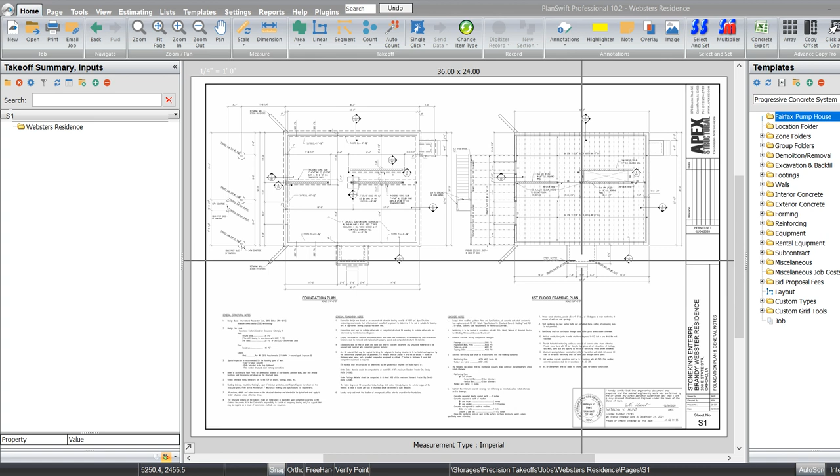So yes, with the stock plugin that you see here, these are all the stock items that come with it. With that, we can certainly do a residential takeoff here. We have just a simple house, pretty small one actually, doesn't even have an attached garage. Looks like it's 36 by 30, so we're going to be roughly in the 1,000 square foot range, somewhere right there.

So we're going to jump in, we're going to do this real quick. Not going to take very long, but we'll just show you that the parts here within the parts and assemblies in the plugin can certainly be used to do that.

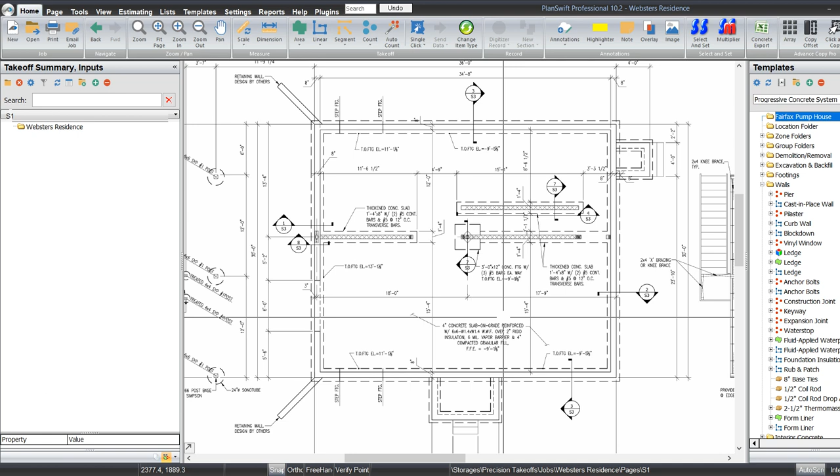Generally you see me do the work in the order that it would be done if I was on the job site. When it comes to walls and footings, I generally do not do that order — I do the walls first, and I've shown this in previous videos, and I'll show you again why here in just a second. Looks like here we got the footings jumping down to a walkout here.

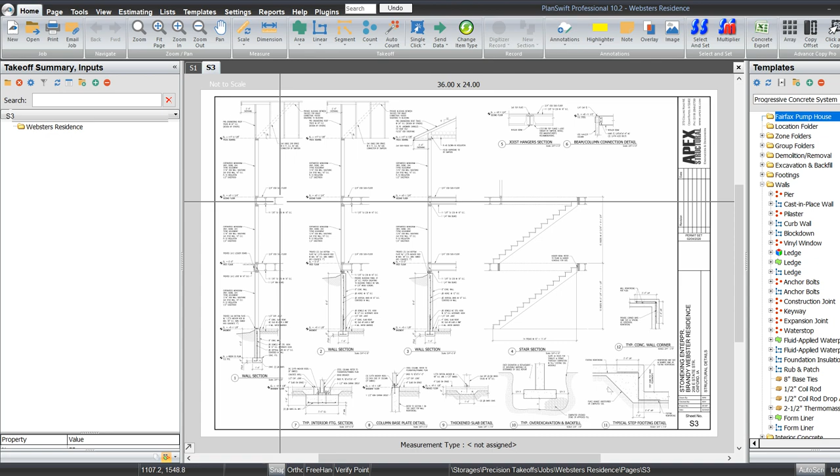So let's check out that 2 and 3, S3 detail here. So yeah, it looks like we're just going to have 8-foot walls, 8 foot by 8 inch on both of them, a 16 by 8 footing. Pretty standard stuff for a residential foundation here in our area.

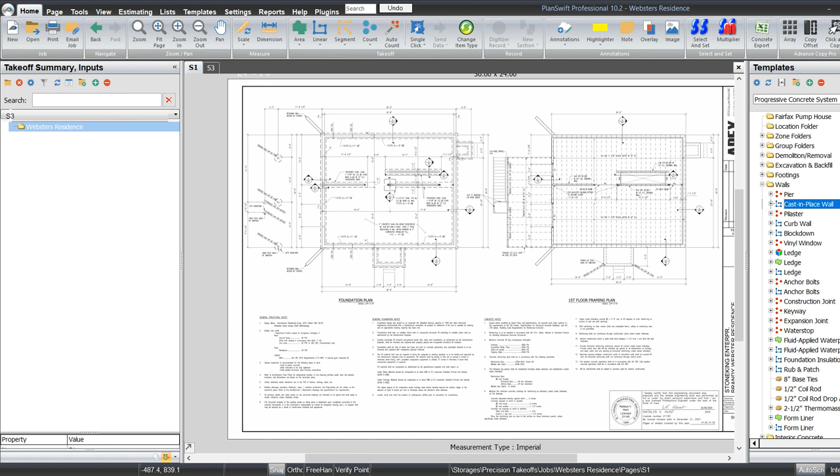So we'll just start dropping some parts in here real quick and get going. So again, all the assemblies are drag and drop. The standard PlanSwift digitizer assemblies are not, but all the ones in our plugin here are.

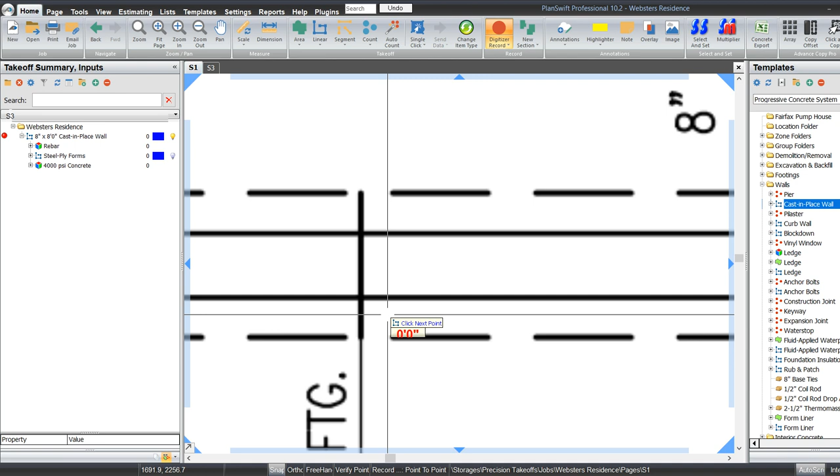So it looks to me like we're that 8 foot tall here, and looks like it goes around to pretty much the same area on the other side. Looks like it jumps down about the same spot there. So we'll just start here.

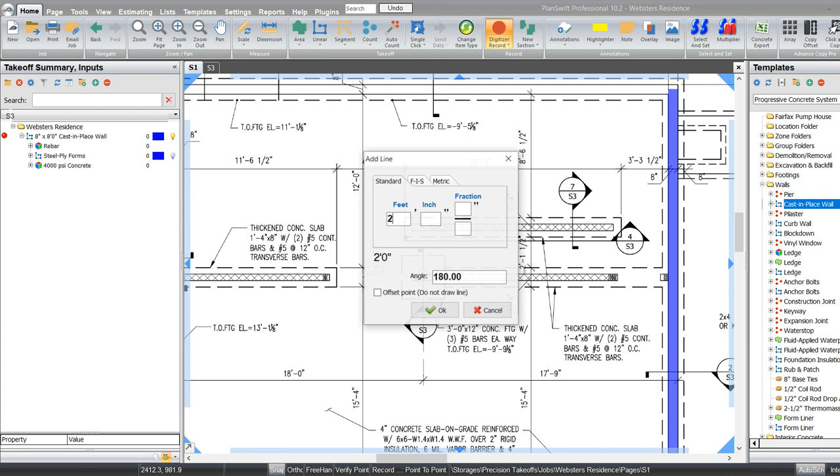And when I scaled the page, it was pretty darn close to being right on the money, so I'm just going to go with the measurements here instead of looking at the actual dimensions, and I bet we're going to be alright. We'll check one here, and let's see if that gets us right there. So yeah, looks like those are correct, and we should be 30 foot out there, and we are, so that's good.

Alright, it does give us some footing elevations, so we do know where we're at, and it's not even a 2 foot jump. Looks like it's 1 foot 8.

So what I'm going to do before I do any more, I'm going to get the rebar and the items set on this wall here.

Looks like we're going to have number 5 uprights at 12, and number 5 horizontals at 12. So let's just drop those in. That way when we duplicate this wall to change the height, everything will change with it, and we don't have to do it again here.

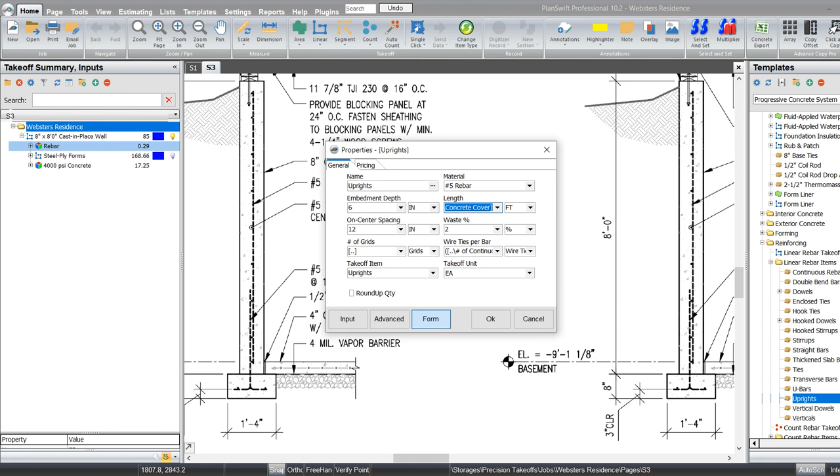So we'll drop those in, we'll change it to number 5 here. We're going to be 12 on center, going to be 1 grid of those. And we'll need to change this to use it for the wall and not the footing there. And yep, that'll do that.

And we got 1 grid of, I think these are going to be number 4s preset, but we need to change them to 5s. This customer here, the customer I'm doing this takeoff for, he wanted to bid the job the way it shows on the drawings. Really in our area it's all going to be number 4 bar, but he wanted to bid it the exact way it was shown on the drawings. So that's why we're using the number 5 bar. And looks like that's going to be it.

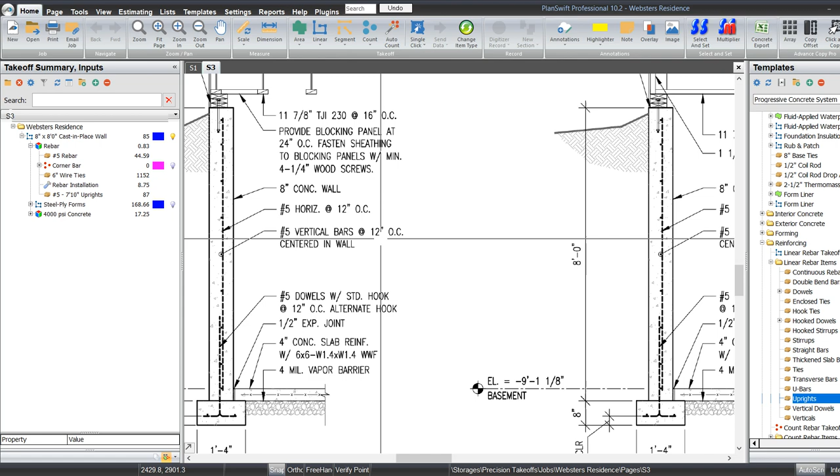Yeah, anchor bolts to be supplied by the builder. He will always exclude them.

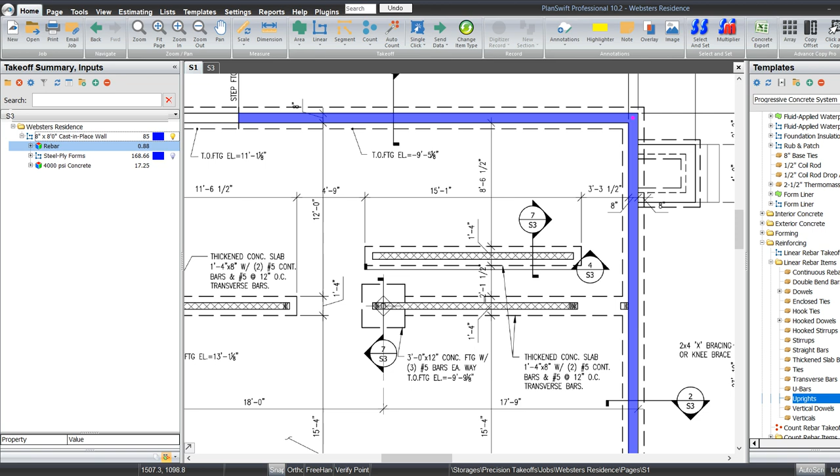So we got that set. I guess we could pick up our corner bar real quick if we want to do that. Most guys will just take their 20-foot sticks of bar and bend them around the corners. This particular customer doesn't—he will actually do it the way any engineer would show you. I've never seen an engineer take a 20-foot bar and bend it around a corner.

All right, so now let's just take that and duplicate it. We're going to go 1'8", so we're going to be at 9'8" because we had a 1'8" jump. Let's just change the color there. And the height of those bars and the horizontal bars would actually change with that.

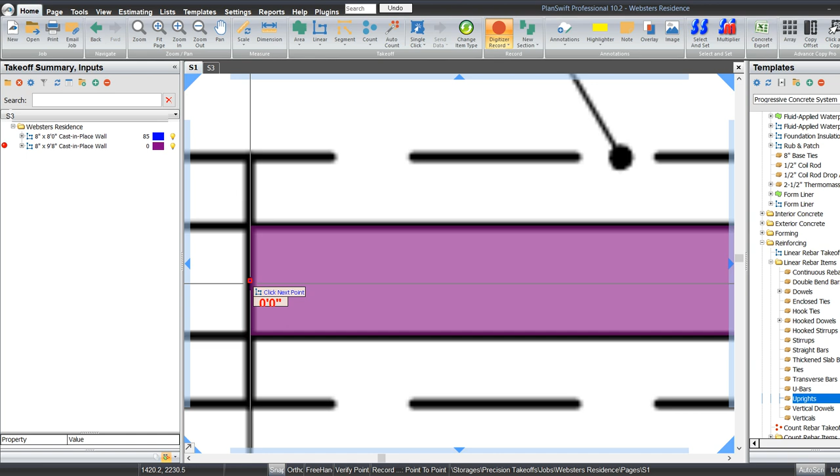And I'm just going to do it at 5'2". I imagine this is going to be a scenario where you're going to probably just do it 5 foot, because he's got 2-foot wide panels, so he'd probably do 2 panels and a 12-inch filler, or he might even extend it to 6 foot if he could. But I doubt he's actually going to do 5'2". Again, we're going to do it the way it shows on the drawing here.

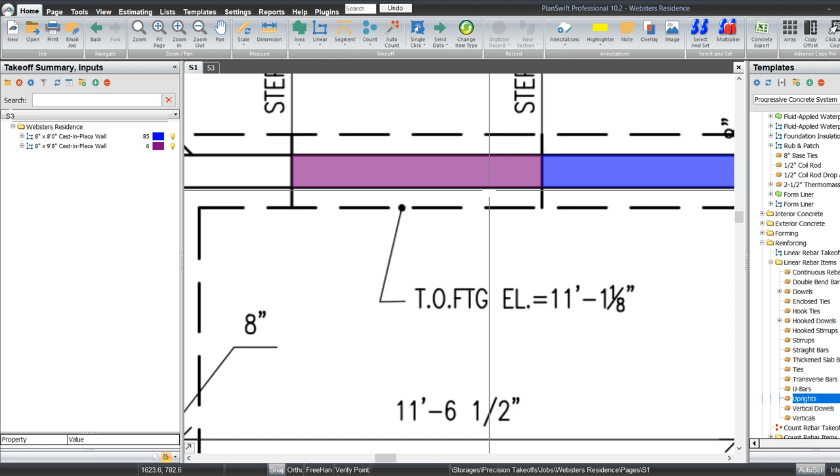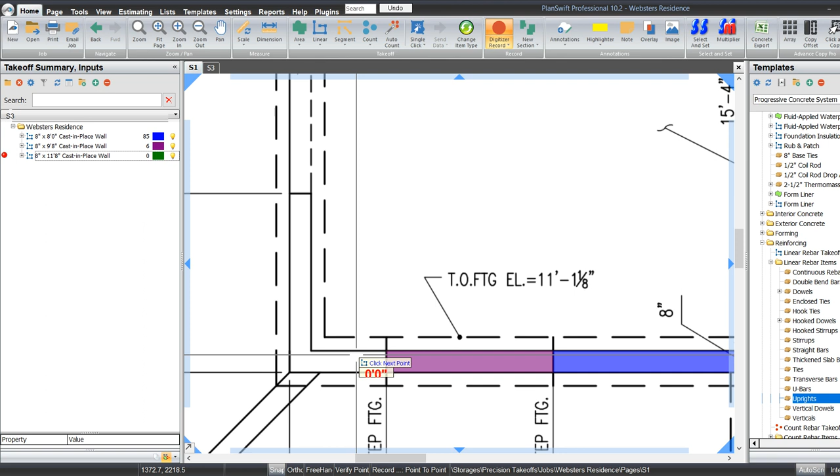And it looks like we're going to jump one more time, and this one is going to be a 2-foot jump, so that one's going to be taking us to 11'8". Again, let's just change the color so we can see it a little bit better. And what was that? 29.4, I believe.

All right, there's our— nope, sorry, that's wrong. We got a walkout there. I need to do that. Sorry guys, I got a little bit ahead of myself.

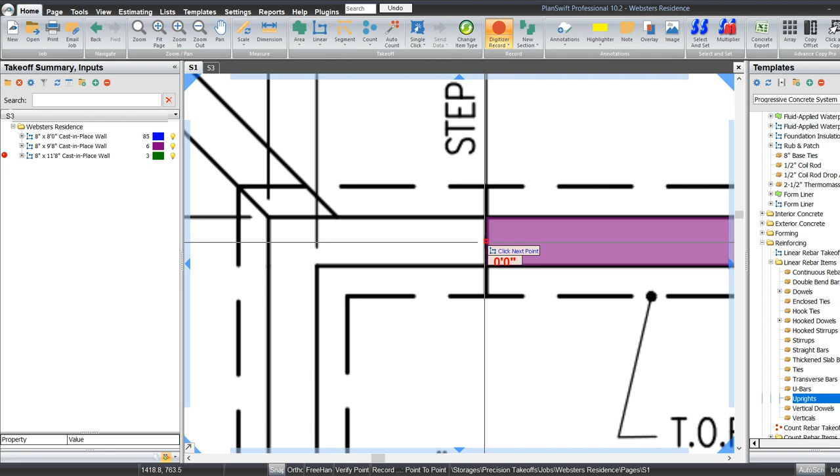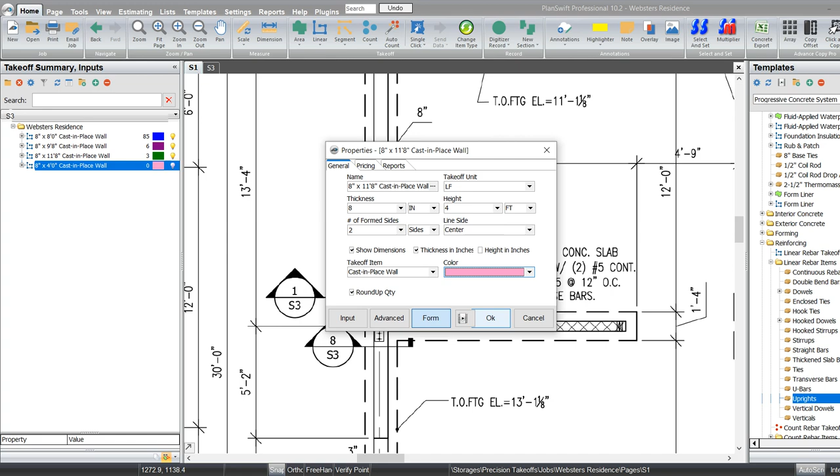All right, so there's the 2 side walls anyway. Now we need to do a wall there for the walkout, and that's going to be 1S3. And we're just going to be 4 foot by 8 inch, and looks like number 5's at 12 on center again. So we'll just take this and duplicate it and change the height again. So this will be our walkout there. There we go.

Okay, so there's our foundation walls done that quick. He wanted to exclude the retaining walls for now—it's going to be site dependent. The owner was talking about taking a large majority of the dirt off both sides of the house down, so those might not need to be. He wanted to do some block retaining walls, landscape walls, instead of doing poured concrete. So that'll be something extra to add on later, depending on the dig.

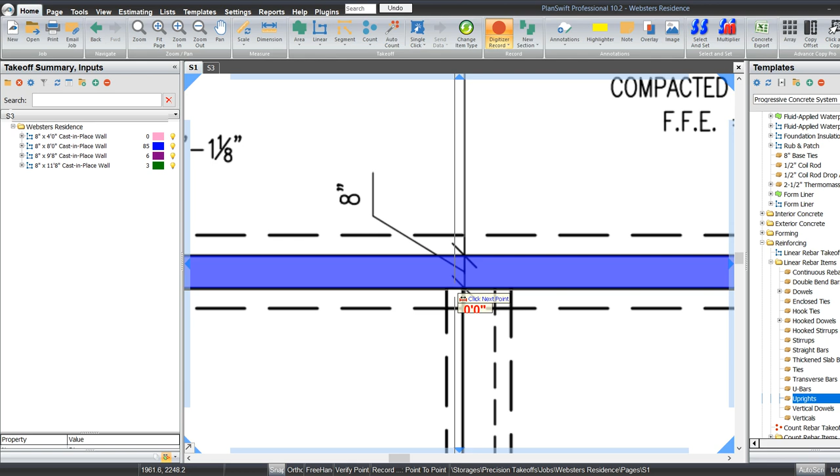And actually, we got these stoops here. We can get them real quick. Let's see how far out they are. Yeah, you're only 5 foot out. You're not even going to be far enough to say he goes a 3 foot dig there. Yeah, you're not going to have 2 foot to even put that footing on. You're only going to be a foot back. So we're just going to have to do these at 8 foot walls also.

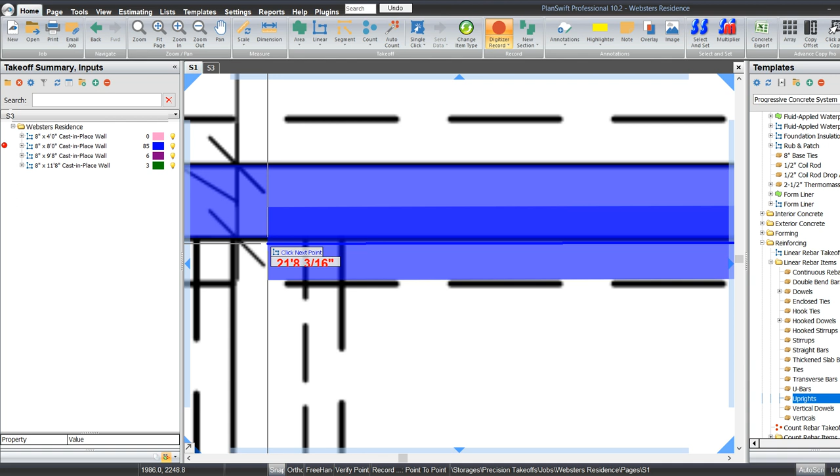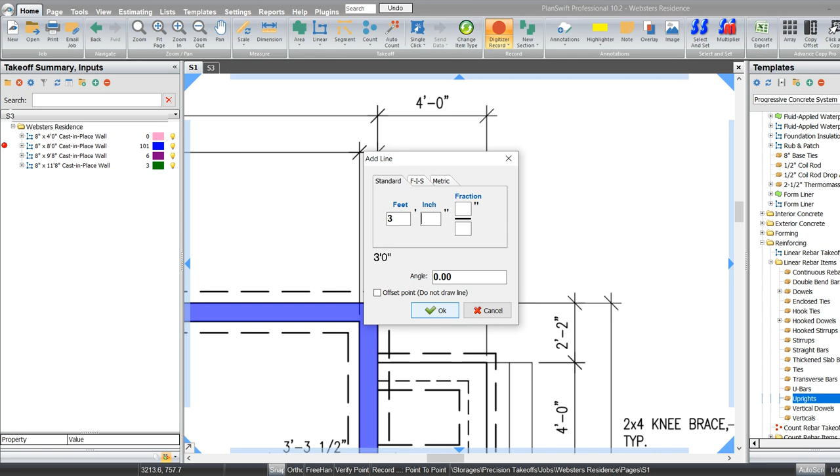So we'll just go ahead and drop these in. What was it, for 8? Okay, and we got another little one up here, even smaller. Give dimensions, sure it does. Alright, there we go. So those are both 8 foot walls, match those. I'll possibly drop down here for the stoop cap to sit on, maybe, I don't know. But that's just information we don't have, so we'll just assume they're 8 footers.

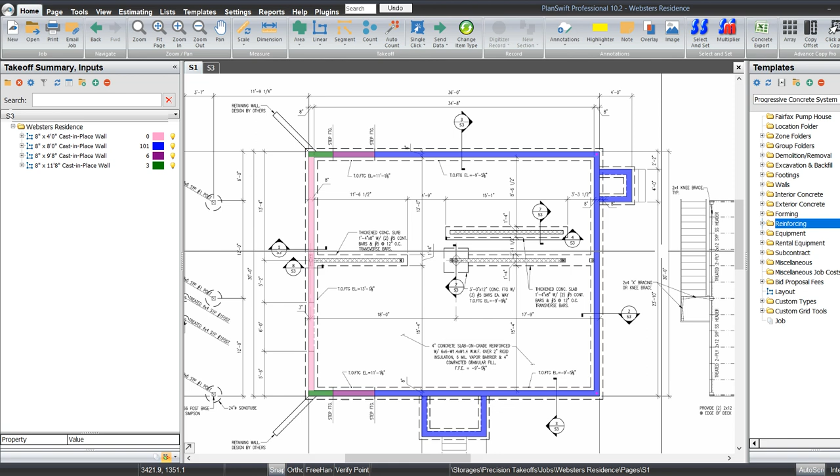Okay, now again, I told you a lot of times I do the foundations first before I do the footings, and here's why. I'm never going to have dimensions to the footing corners. I'm going to have dimensions to the walls though. So once I get the walls set, generally, and certainly with a residential house foundation, we're going to be centered on there.

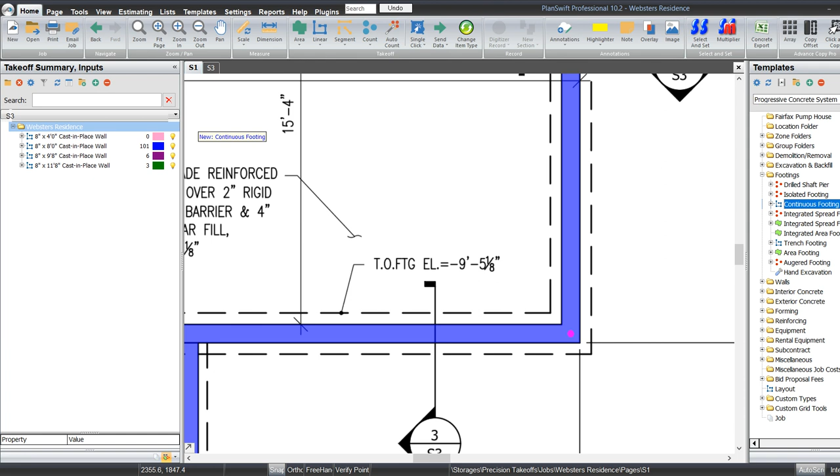So we'll just drop a footing in here, and all this footing window will pop up for us. There we go. So we're going to be 16 by 8. Elevation doesn't matter because we're not putting any excavation in here. Number of formed sides, I'm going to set this to 0. Actually, I'm going to set it to 1, and I'll show you why here in a minute.

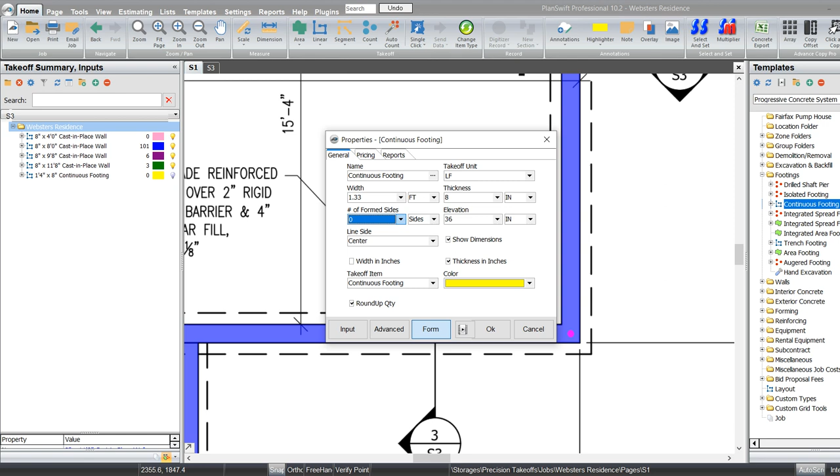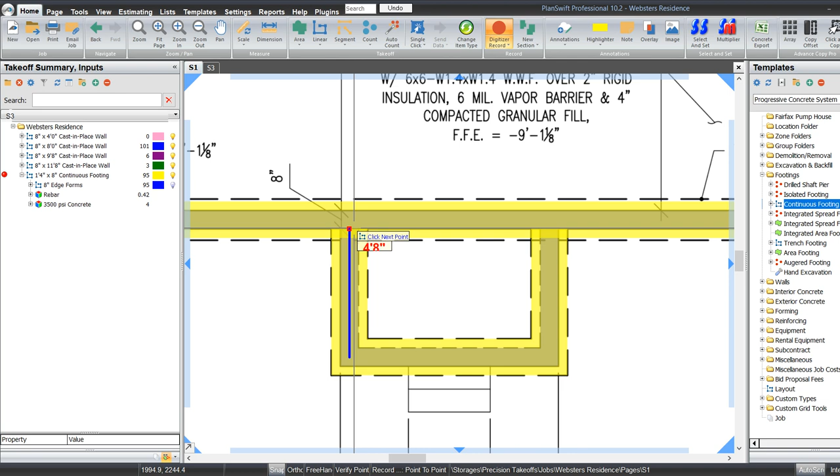So basically, we're going to have this footing here. This is all going to be the upper footing. And yeah, I realize that those footings are overlapping there—we'll fix that here in just a second, it only takes a couple seconds to fix that. And we're going to have that footing there. And this footing, even though the walls are different heights, the footings are all going to be the same.

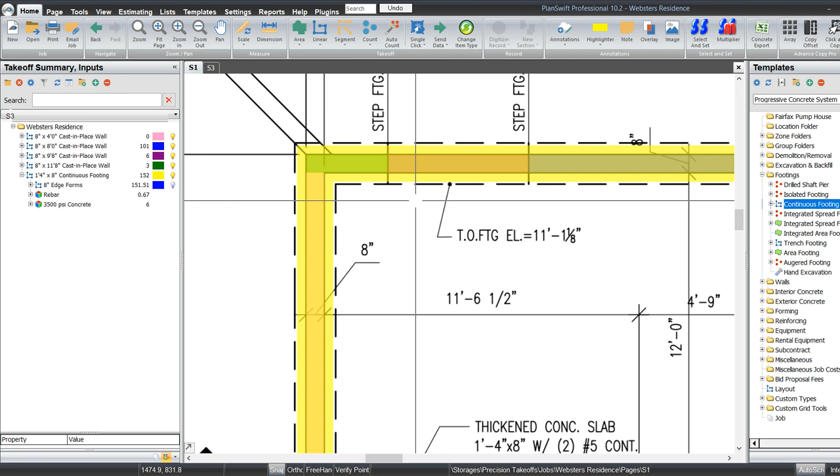Alright, so there's our footings. So now what I'm going to do is back them off so they line up there on the edges. Not a big deal, but it only takes a second to do it right.

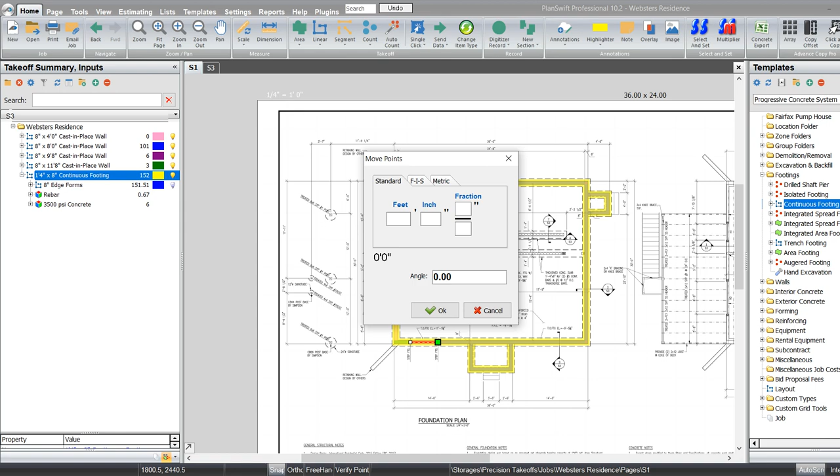And now I've also got these, since we got jumps here, I just go in an extra foot on those to pick up some extra concrete on them. Same thing here. And then we can just take that and put it back behind the walls.

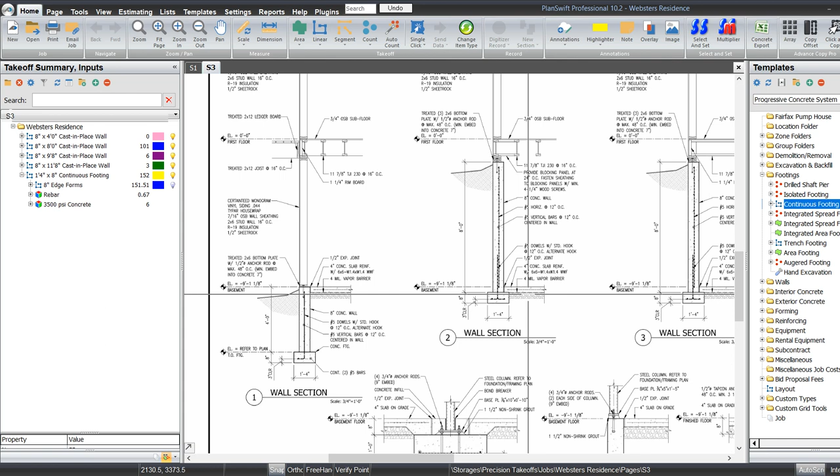Let's go back to our detail and see what we got, 2 number 5s. We're going to do number 5 dowels sticking out at 12 on center. So we'll go here, number continuous rebar, we'll just set that to 2. Number 5 is already set. Residential footing, we don't have any transverse bars.

This here, I'm going to go 3'4". Actually, I'm not even going to go to that. I need 4, 30, 34, 2'10". I need 3 foot to get me the proper lap splice on that. 30 inches sticking out of the footing. Need those at 12 on center. That's good.

And that should do our footing right there.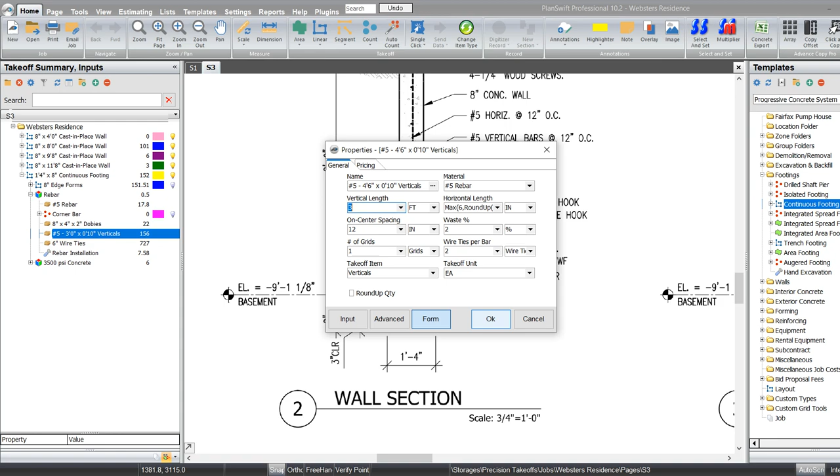So now we can just pick up some corner bars in that footing. Need to pick up a couple of corner bars in that pink wall right there too. So we'll just go ahead and pick these up real quick. Get all our footing ones done and come back and grab them wall ones that we missed.

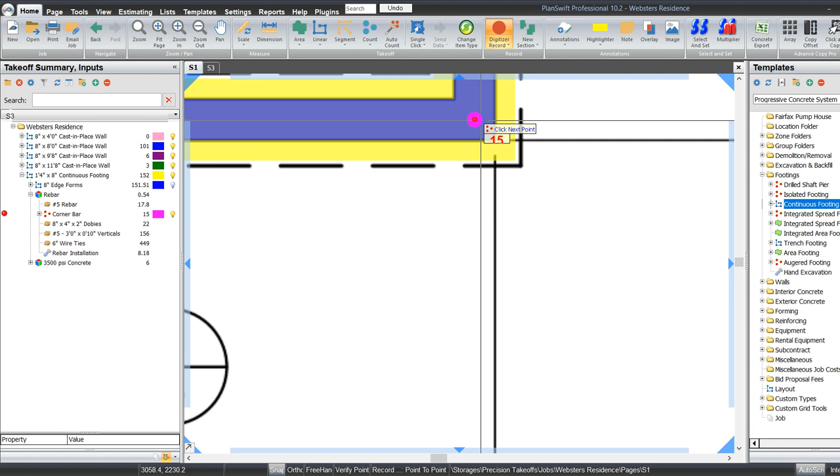Okay, that'll do the footing. And let's turn that off. Let's just get these wall ones right here. Since we've already started on them, let's just continue with that same count. Need a bunch of them up here.

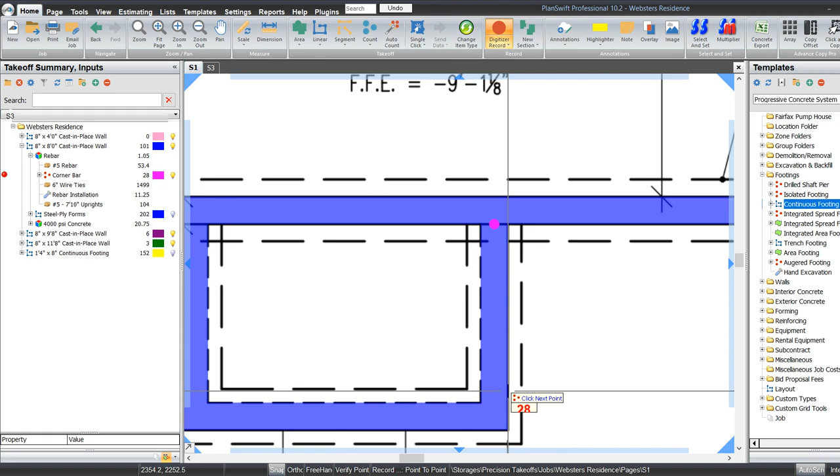Okay, got those, and that pink wall we need to tie in. And the reason I'm tying the pink wall into the green, not the green into the pink, is because the pink wall is shorter, has less bar. If I tied the green one into the pink wall, it would be sticking bars out of here that are above this wall that would do us no good.

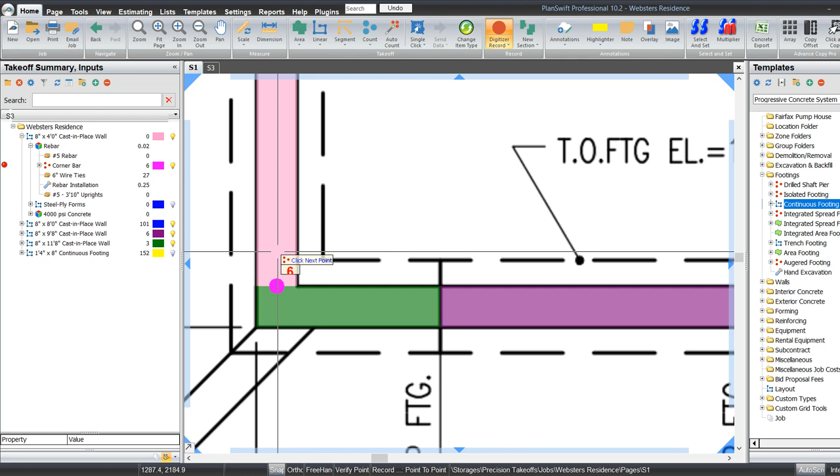So that's why I'm tying the shorter wall into the taller wall. That's why I'm digitizing the corner bar on that. The size of the bar is obviously going to be the same, it's just a matter of how many of them we need. Okay, and that should do that.

Now we just have a matter of some interior footings there to pick up. And those are on 7S3. Where's that at? Right there.

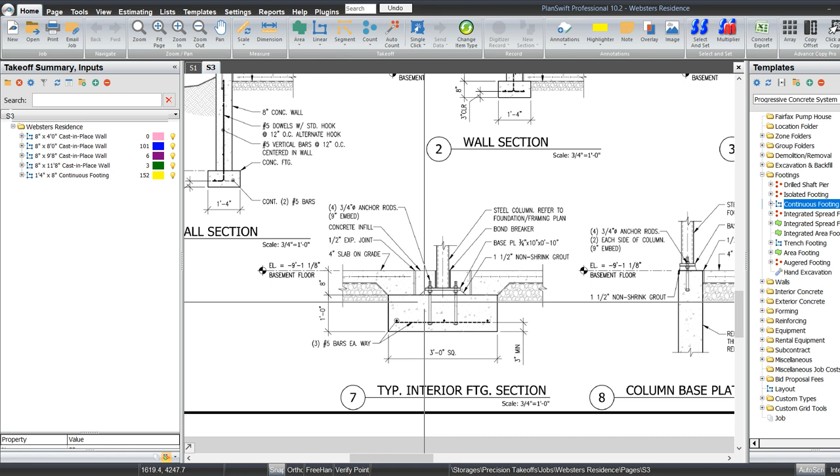Okay, looks like that was, says that was that one, but it also says that's the same one right there, and that ain't, oh, that isn't right. What's 4S3? Stair detail.

Thickened slab. Huh. So I guess that's just some thickened slab, and maybe

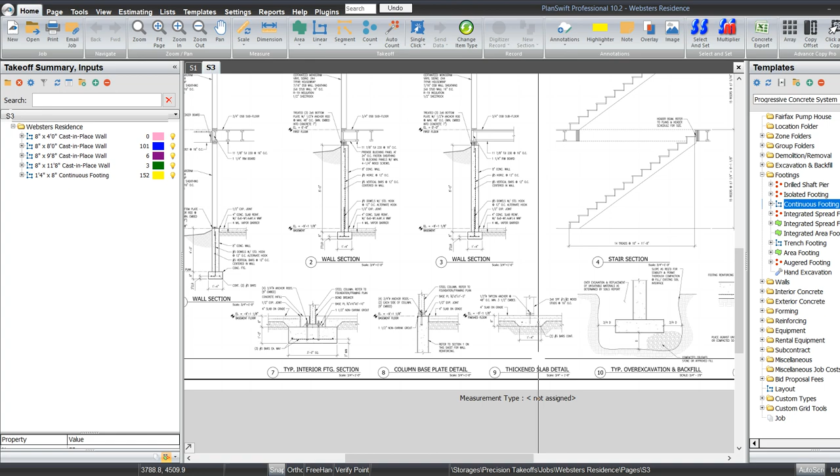looks like we're just doing that one footing right there. So 3x3, easy enough. 3 by 3 by 12, 3 number 5s each way. Looks like the rest of it's just thickened slab there. 3 by 3 by 12.

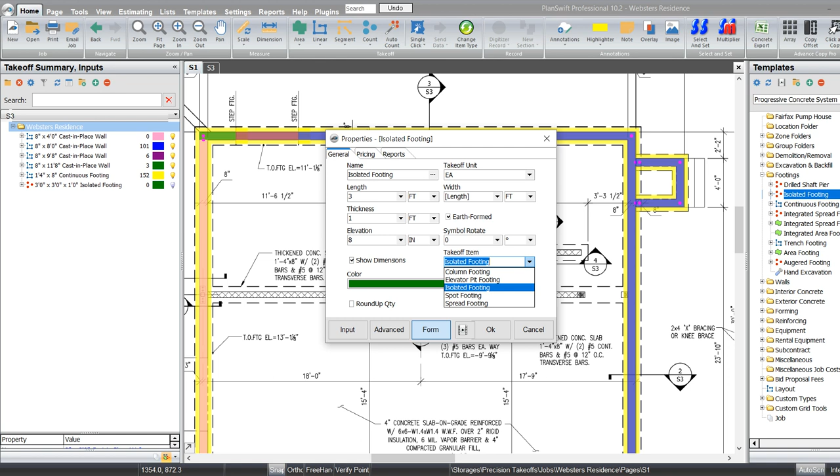Enough. Okay. Thickened concrete slab. Yeah, I'm not sure. Shows those tied into that footing, but it's really not. Doesn't show a detail for interior footings, just shows a thickened slab. So that's all right, we'll get it in there.

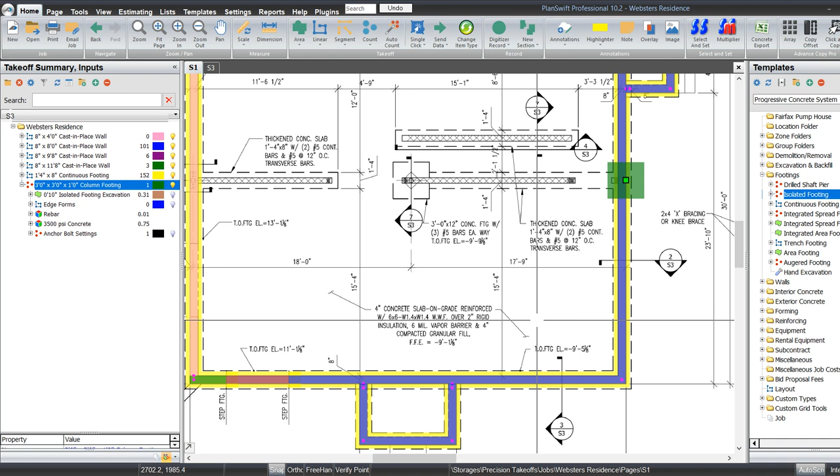Over 17.9. There we go. So there's the one footing that we actually have, and yeah, I mean they're going to be framing a wall right there anyway. They're never going to do a column block out on that, so I'm not going to put it in there. I know he wanted it bid the way the drawings show, but they're never going to do that.

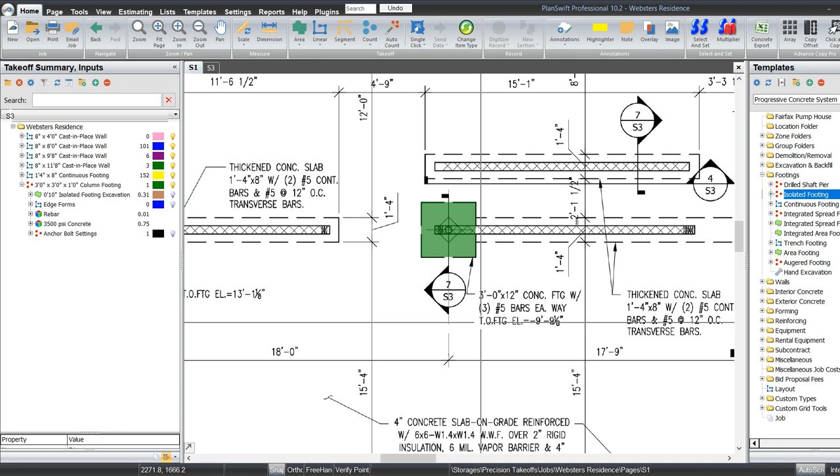So looks like that's it. Looks like we're done with the footings and walls. I guess one thing we can do is we can throw some jump bars in there. Let's do that real quick for where the footing jumps are there.

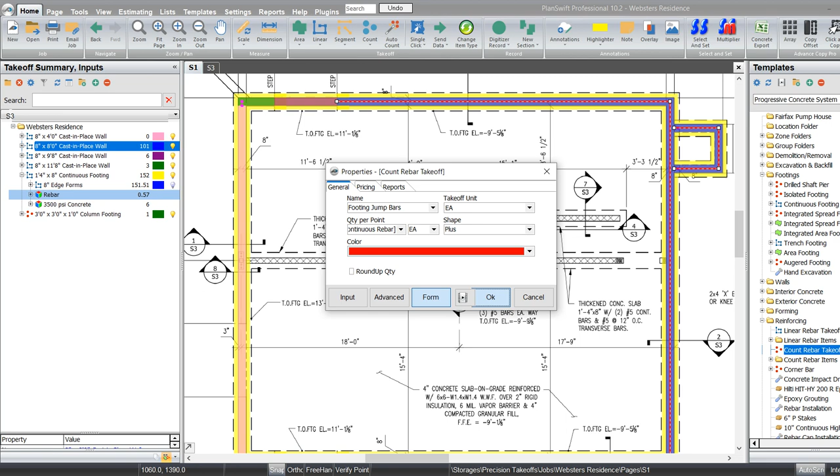Alright, so we got a footing jump there and there, and we got 2 more here. Okay, so we'll just go to our count rebar items.

Take our footing jump bar, drop it in. We're going to be number 5s, and we're going to have 2 bends. I always go 2 inches longer than the lap splice, which would be 2.6. Obviously on a number 5 bar, it'll be a standard lap splice.

Leg 2 is going to be 2 because we got a 2-foot jump on one and 1'8" on the other. I'm just going to leave them at 2 instead of doing them separate. And that'll get those for us.

And right there, I know you see 9 there, you see nothing there. It's just a refresh issue. If I do that, it's actually there.

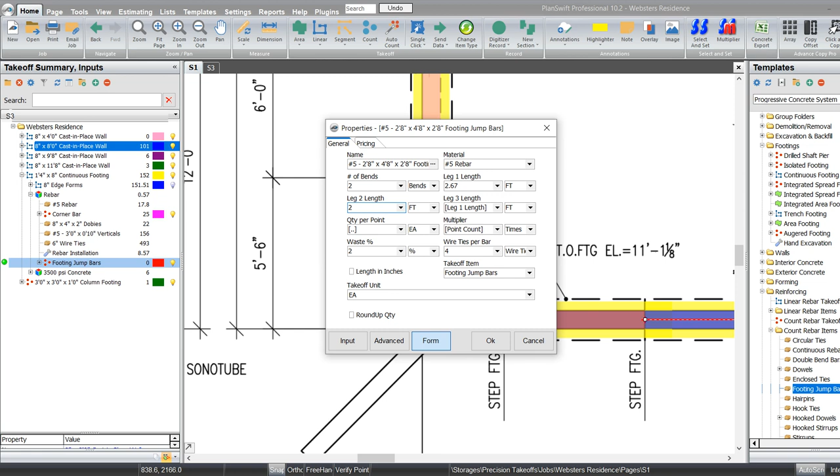Okay, so let's just get everything in order here so we can keep track of it. We got that, we got that. What else? That's gonna be it. It's ready to move on to the slab.

So let's go here, and what are we gonna have? 4-inch 6x6 wire mesh, 2-inch insulation underneath it, 6 mil vapor barrier, 4 inches of rock.

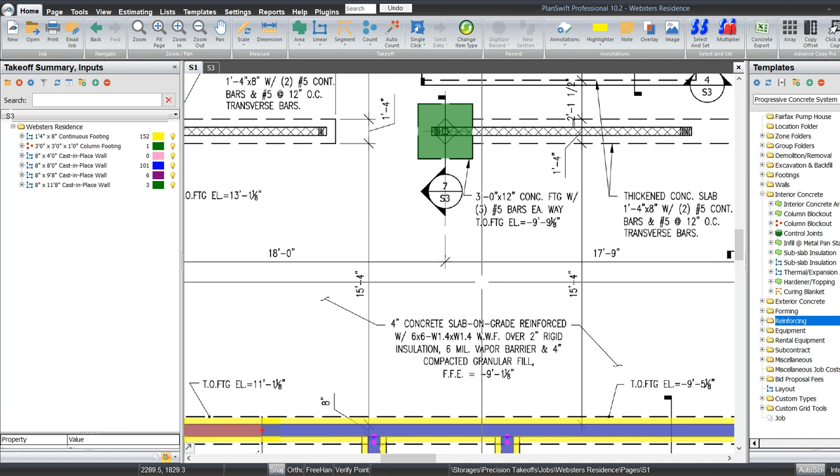I know they're going to do 6 inches of rock, but he wanted to leave the rock out and build that separate depending on the dig, because he's not digging the hole.

Let's just get our slab in here. So we'll go 4-inch, rename it for residential purposes here if we want to. And we'll be just inside the walls, obviously.

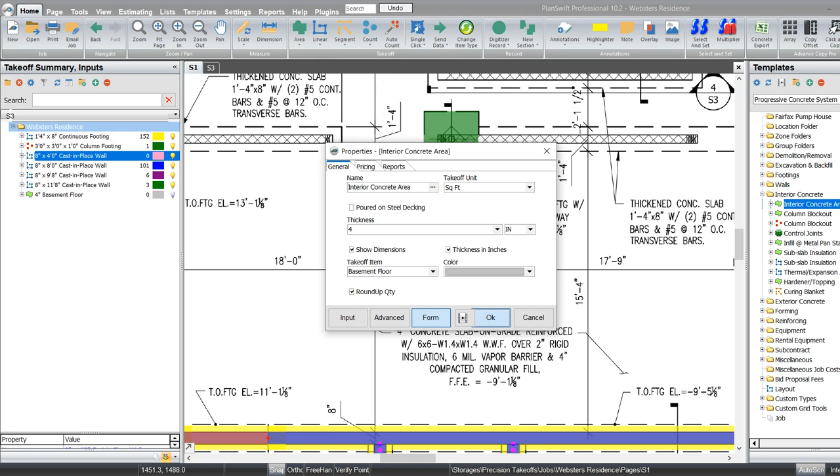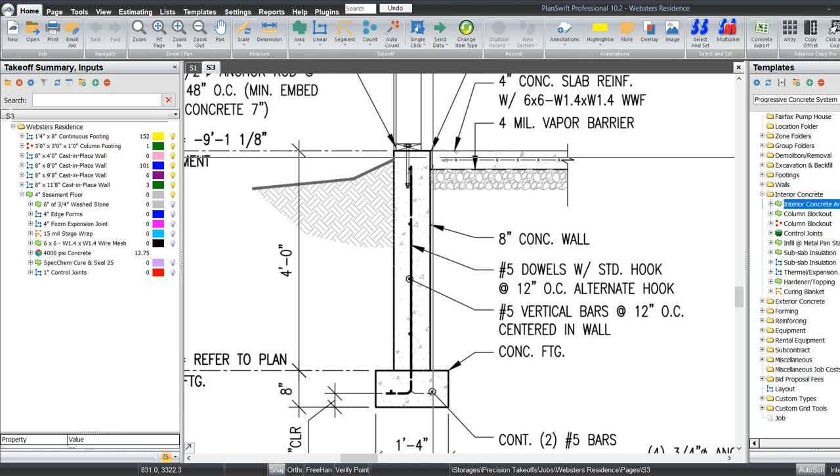And here, I'm actually going to put a ledge in there for him. If we look at that detail, that one S3, if we go back to it right here, shows that wall, or that slab, just being poured right up against that wall. On that walkout, since you're going to have all this fill put back in here, I know he's going to want a slab ledge to be put in there, so I'll just do a double 2x4 slab ledge.

So the way we can do that, we don't even have to digitize it. We can just take our linear ledge part, drop it in that wall right there, that pink wall, and we're going to be 3 inches wide, and let's go 4 inches down. It's called the slab ledge. It's ready for us to digitize, but we don't need to.

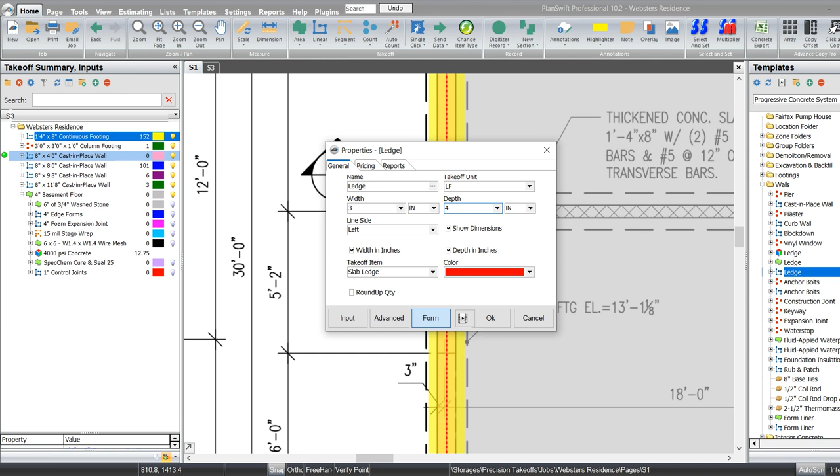Oops, we're going to be 3-inch there. Alright, so there's our slab ledge for that.

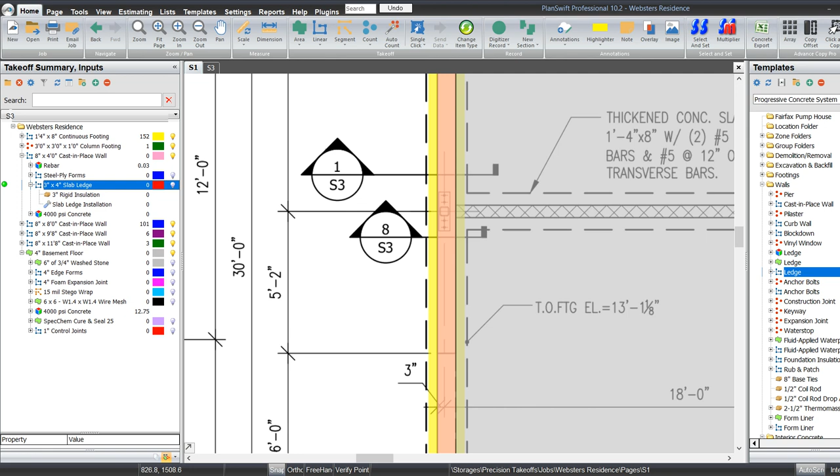So now what we can do is we can take that slab, move it over 3 inches because that's where it'll actually be. And we're going to take this and set it to 0, so we need to uncheck both those. And you could either delete it or put 0 in. It's going to be the same thing either way.

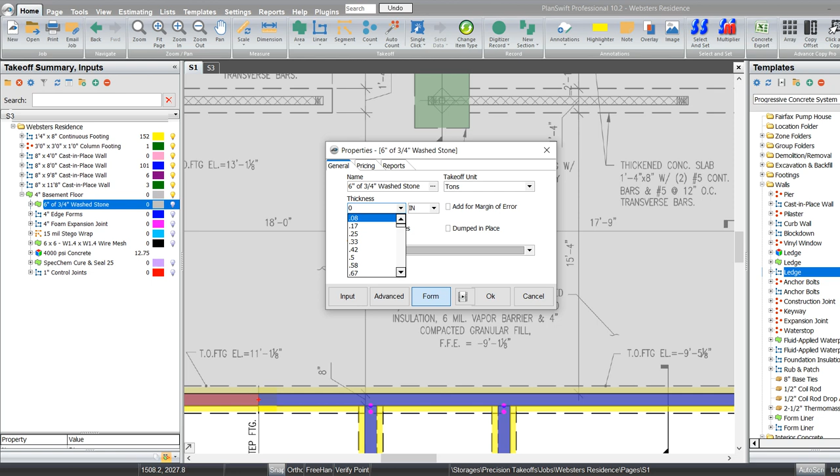And if we refresh this, we see that we got 1,001 square feet there. No sub base, but we actually have labor for placing it and for grading it. Basically, we're just not supplying the material there.

4-inch edge forms. This basement floor here, we're not going to have any edge forming at all. And I think it did show expansion joint all the way around that, didn't it? Yeah, it sure did. It's pretty rare again here where we're at.

We generally just pour the slabs tight up against the foundation because neither one of them are, in theory, neither one of them should move. I'm—

Going to leave it in there. It shows it in there. I'm going to leave it there.

We're not going to tape the perimeter. That's generally only with the stego wrap that we do that, but here we're just doing a 6 mil. And we'll just use some house wrap tape on that.

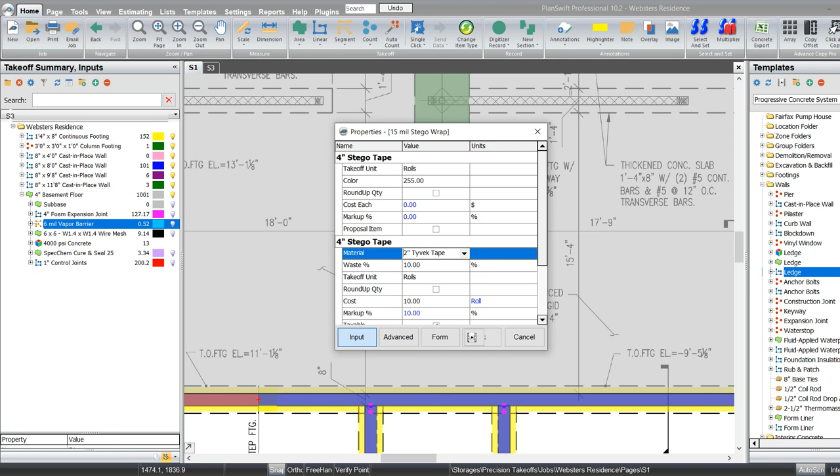Let's see that. We're not going to seal the basement floor. Control joints are good. What else do we need?

Oh, we need the insulation under the slab. So we got a sub-slab insulation area part here. Again, with an area part, if I just drop it in, it's going to assume I want the whole area unless I digitize a certain portion of it if I only wanted it in some areas. So there's our 2-inch insulation right there.

If I just had it in this corner for some odd reason, I would digitize that and it would just pick up that amount. Right now, it's just assuming I want the entire area, which in this case we do. I guess we don't want that 3 inches right there, but I'm not going to digitize it separate to save 3 inches.

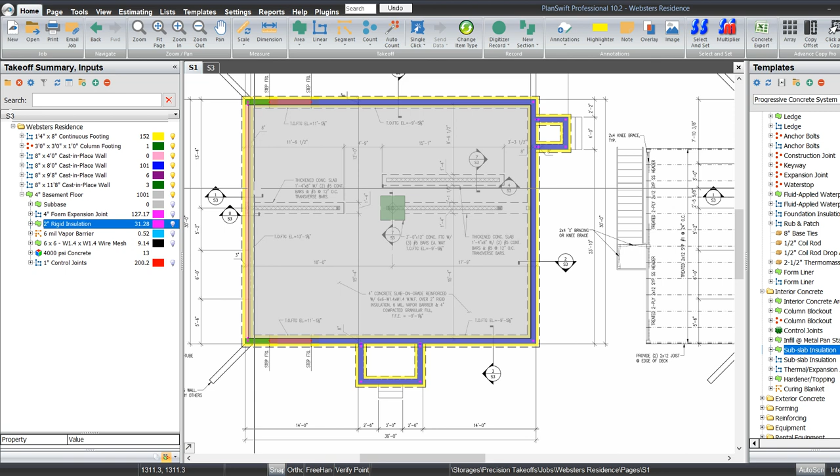Now we just need to pick up that thickened slab right there. So we're going to be 16 wide and 8 deep with 2 number 5s in those areas. So to pick that up, we'll just go here.

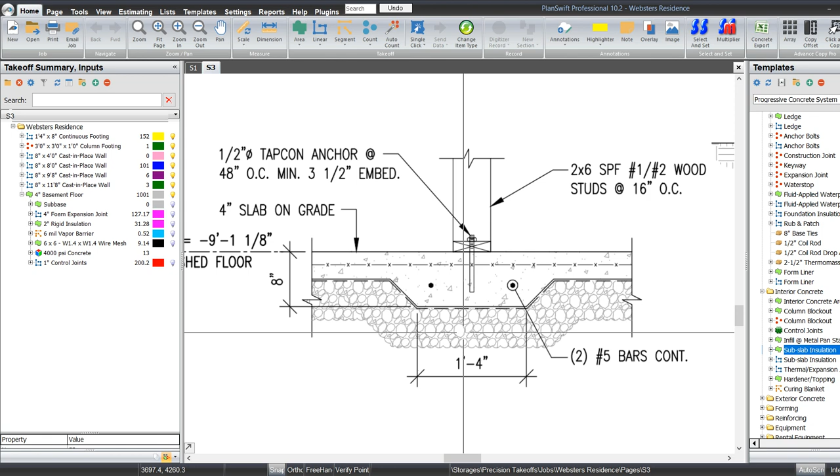Again, the linear and the segment are the same part. The segment just starts over at every point. The linear just lets you keep on going. So I'm 16 by 8, we're going to be thickened slab, and we're going to have 2 slopes because we've got one on each side. If we had a turn down edge, we'd only have 1 slope because it only slopes to the inside, where the outside would be a vertical surface. So we have 2 slope sides, 1 to 1.

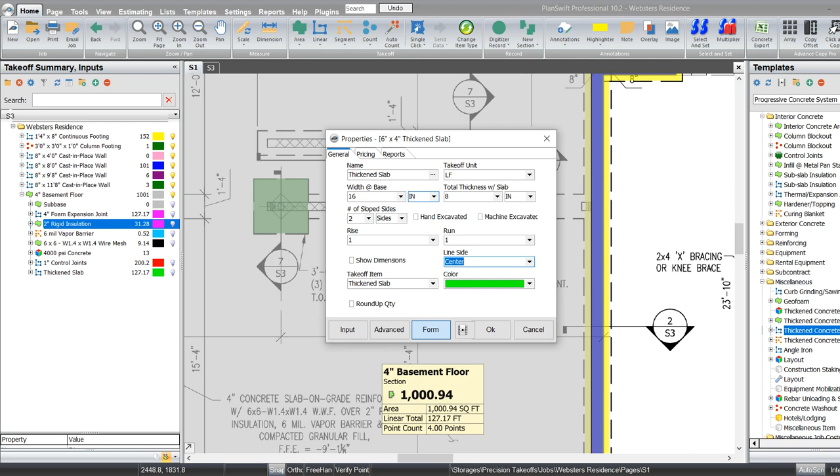And when I have 2 slope sides, I digitize them on the center here. So we'll go ahead and digitize them, then we'll come back and add in the extra rebar that we need there. Just an easy way to line these up. And what do we got? 11, 6 and a half.

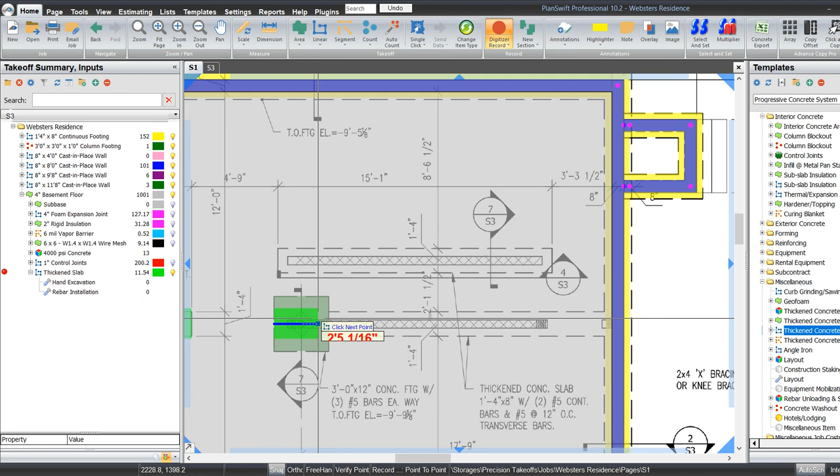I'm going to do it over top that footing, because that footing is actually down from the top of the slab just a little bit. I know it's not down far enough to get the full 8 inches above it, but actually it is, because it was down 8 inches, so we can get the full 8 inches on it there. So it's actually in the right spot. And we're only going to go up to that footing right there.

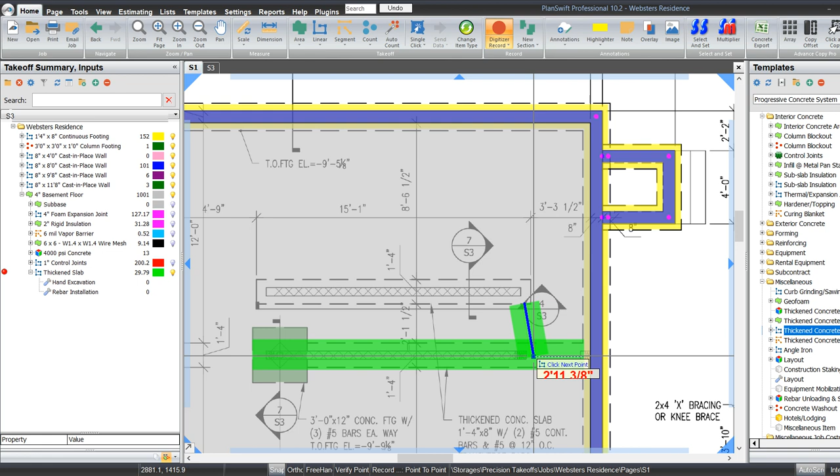And what do we got? Whoops, gotta go there. There we go, now I got it right. We're going to be 15.1. And I gotta go right there. There, we got it. So there's our thickened slab right there.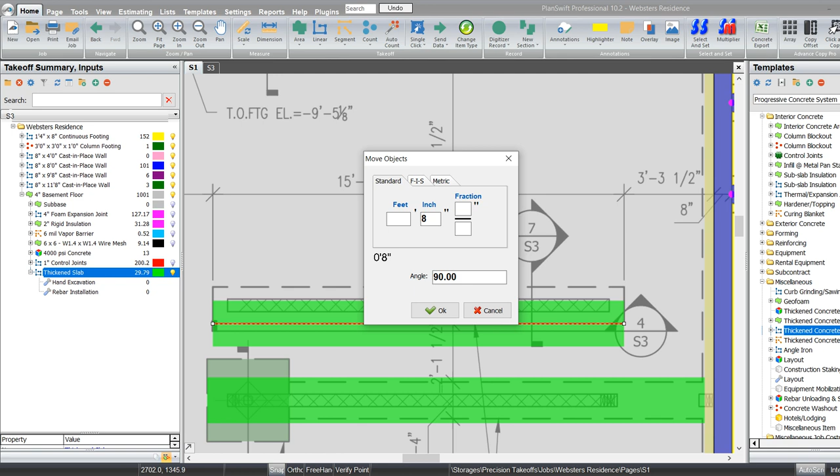And what else do we need? Oh yeah, we need the rebar there. We had 2 number 5s, right? Yep, 2 number 5s.

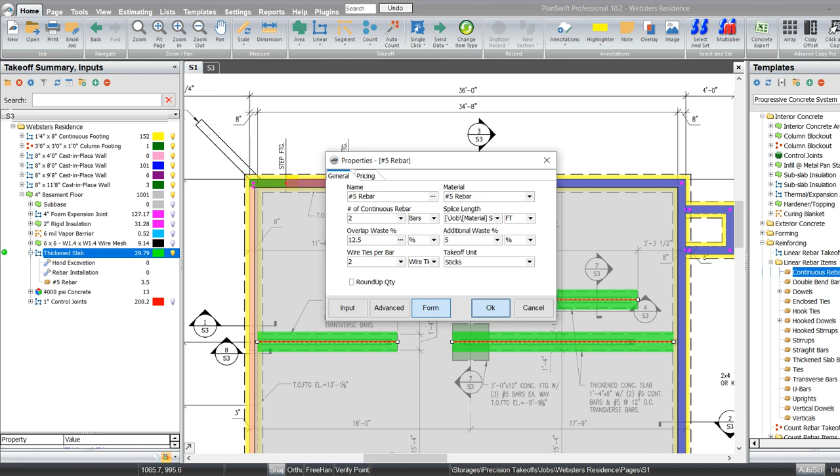So again, we don't have to digitize the rebar. We can just take this - it's going to inherit the linear from the parent item. There's two number 5s right there. It's already going to pick up the overlap based on the splice length. If you know additional waste you want on top of the overlap, you can put something in there if you wanted to. But there's our two number 5s for that. So a little over 3 sticks, and there it is.

He didn't want to bid the exterior concrete. They're getting other bids on that. They're thinking they're going to have somebody else do the exterior. So he didn't want to do the stoop caps. Plus he didn't know how deep they were going to be and whatnot, so didn't want to mess with that. So looks like we're done here.

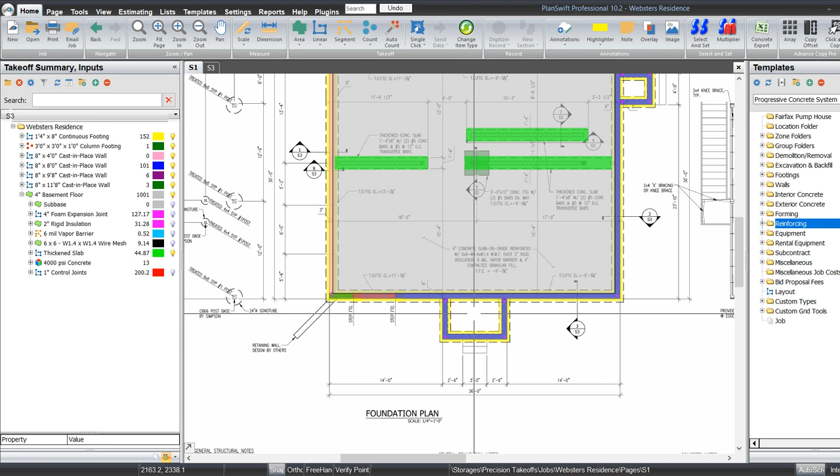So yeah, that's just a pretty quick takeoff. I know a lot of you guys probably just run right through here, just pick up the linear feet of wall and throw a unit price at it. Everybody's got their magical unit price numbers they just happen to know off the top of their head. This customer doesn't like to do that, because generally you're going to be putting number 4 bars in at, around here they're putting them every 3 foot on center, most likely 32 inches tops, I would say. This plan here had number 5s at 12 on center. So unless you guys have 10 different unit prices for all those different scenarios, I don't know how you could get there.

But yeah, we're just showing how easy it is to use the plug-in here. A lot of guys want to know if we could do residential takeoffs with it - here we've shown you we can. I think we picked up everything this customer wants. I know we didn't pick up everything on the drawing here, but this is how he wanted to do it. So yeah, we'll be back with some more videos here. So stay tuned.